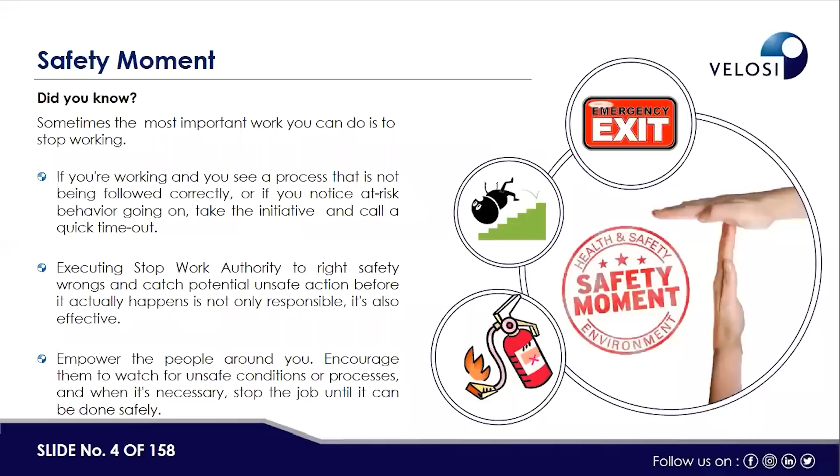Although most of us are in the comfort of our homes, it's Sunday, but some might be working, and we should be aware of the emergency exits that are around us. Due to the current COVID-19 situation and its emerging variants, we should be more careful, keep a safe distance, and in general take care of ourselves and those around us.

Today's agenda includes an introduction about our company Velosi, the project objectives, scope of work, case study overview and results, and then we'll have a Q&A. Now I'll hand it over to Mr. Imran Saeed, who will start with today's topic.

Good day to all the participants attending this online session. As my colleague earlier stated, today's topic is related to the integrity and HSE management of petrol stations. The first part of the presentation will be the introduction, covering the technical part about the HSE management system for petrol stations.

Importance of integrity and HSE management in the oil and gas industry: ensure that infrastructure, facilities and equipment are working correctly and efficiently without jeopardizing employee and asset safety or negatively impacting the environment. Like other HSE studies and risk assessments, the overall purpose is to ensure the safety of people, the environment, and the capital assets.

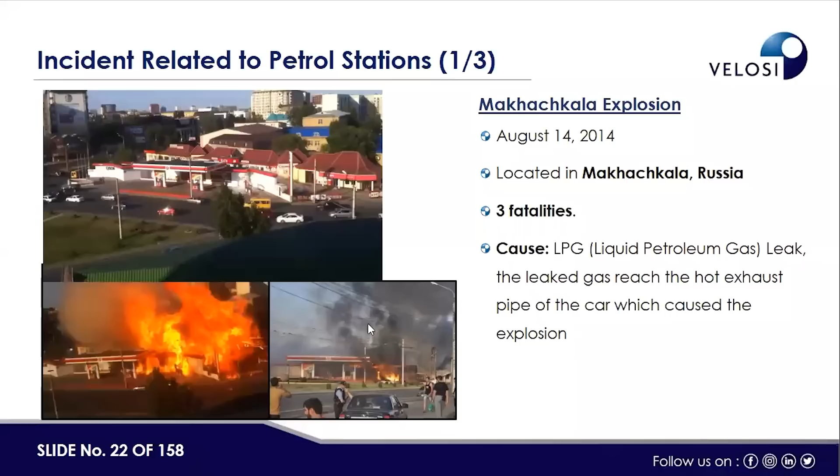As we are all aware, some petrol stations are near cities where a lot of people are living. So in order to ensure the safety of people and environment, because these are areas where any leakage can cause an explosion, which can ultimately injure or even kill people living nearby.

If we implement these studies, the HSE and integrated management system, what benefits can we achieve? These are summarized as below, not all, but a few: ensure the well-being of all employees, identify the potential HSE risk, identify measures to deal with these risks, minimize risk of unnecessary downtime, reduce costs associated with accidents and incidents, avoid preventable

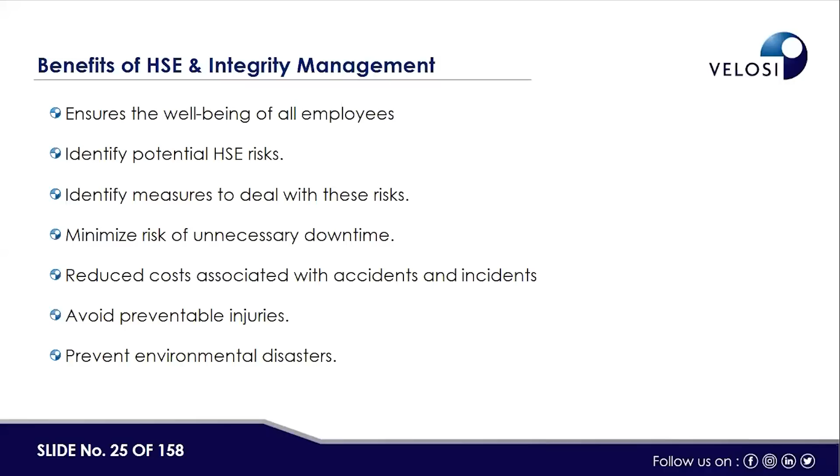injuries, prevent environmental disaster. As we explained earlier, the steps are: first we need to identify the hazards, then we need to evaluate these hazards, which is called the risk, and then ultimately we can reduce the risk and the costs associated with accidents and incidents.

There are different reference standards used in order to carry out these studies, which are listed here, like NFPA 30A and HSG 146, which are basically the main two: NFPA 30A, Code for Motor Fuel Dispensing Facilities and Repair Garages, and HSG 146, assessing and controlling the risk of a fire and explosion at sites where petrol is stored and dispensed as a fuel.

Then the API-RP 2005, and then in order to evaluate, because at the petrol station there are storage tanks and associated piping, in order to identify the risk, the damage mechanism, and perform the risk assessment, the standards associated with this risk assessment study are like 571, 580, 581.

Then because in the petrol station there are underground facilities, underground storage systems, API-RP 1615 for these, API-RP 1621, 1631, then for the underground piping and storage tank, to provide external protection, CP systems are installed, and for that API-RP 1632, then the management of underground petroleum systems, API-RP 1635.

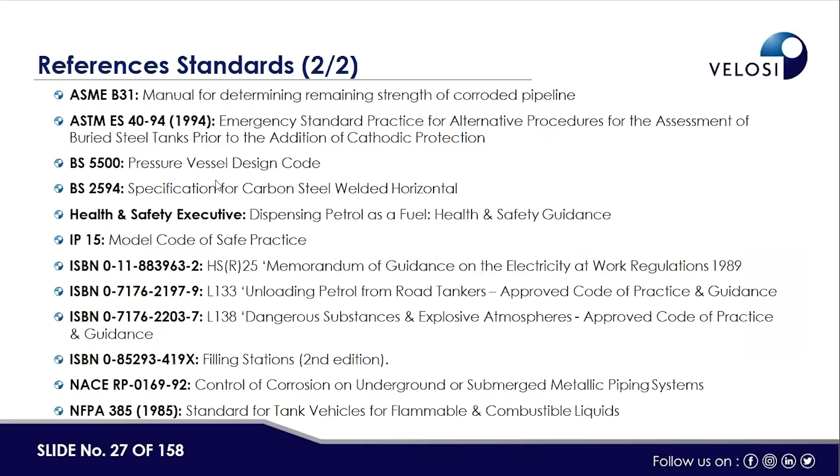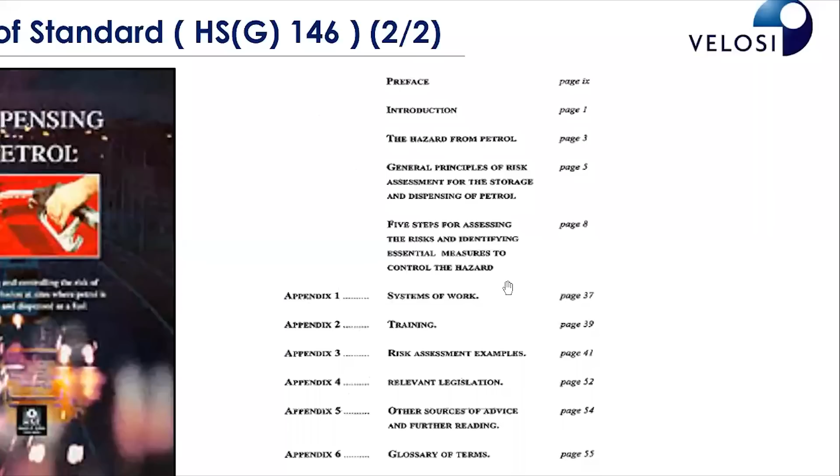This is the table of contents: introduction, the hazard from petrol, general principles of risk assessment for storage and dispensing facilities. There are basically 5 steps for assessing the risk and identifying essential measures to control the hazards, then the system of work, training, and risk assessment examples. We will define these steps in detail in our next slide where we will present the case study.

The other standard, an overview of API-RP 2005, which provides information and recommendations for service station facility managers, employers, or designated site operators on the basic principles of safety and fire protection.

The type of service station operations covered include full service, self-service, with or without repair bay, car washes, convenience stores, food kiosks, and also truck stops and quick lubes. These are the basic facilities and different items within a petrol station, and it covers how we can protect these.

This standard is presented in two sections. Section 1, general service station safety measures, addresses issues common to all types of service station operations. Section 2, service stations with repair bay operations, covers the unique concerns of this type of operation. These are the contents of this standard.

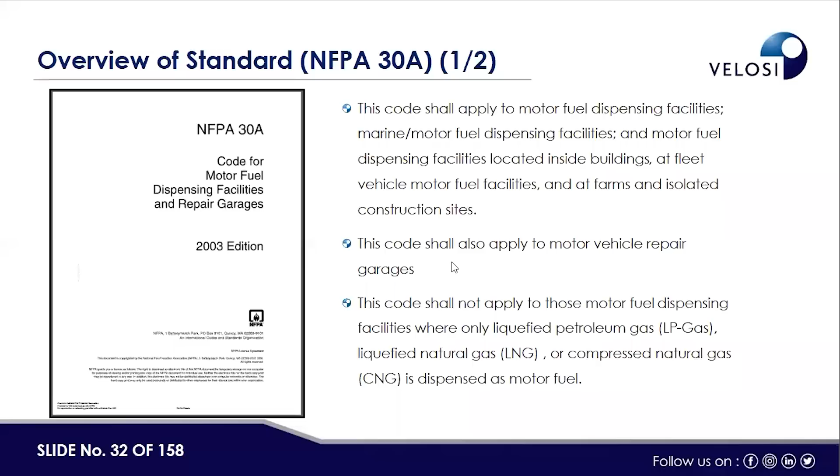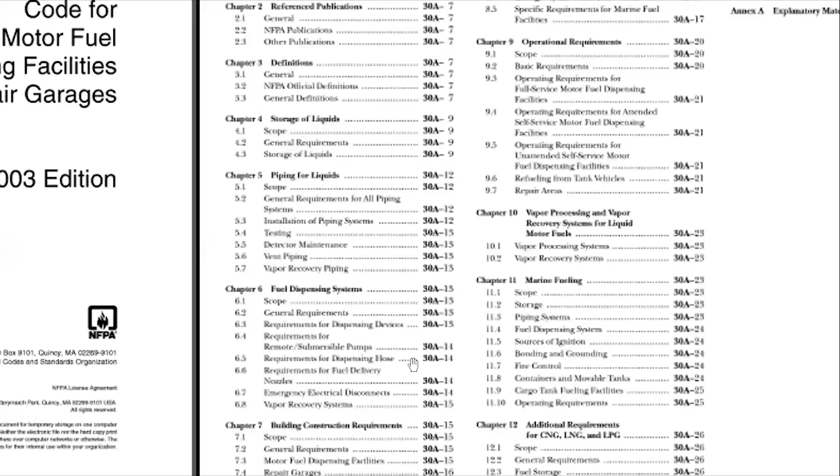The table of contents: the first chapter is about administration, which covers scope, purpose, and application. The next section is about reference publications, then definitions, then storage of liquid, then piping used for liquid from the storage facility to the dispensing machines, and fuel dispensing systems—their requirements about pumps, submersible pumps, dispensing hoses. Then the next sections cover buildings, electrical installation, operation requirements, vapor processing, and vapor recovery systems. These are the different chapters covered under this standard.

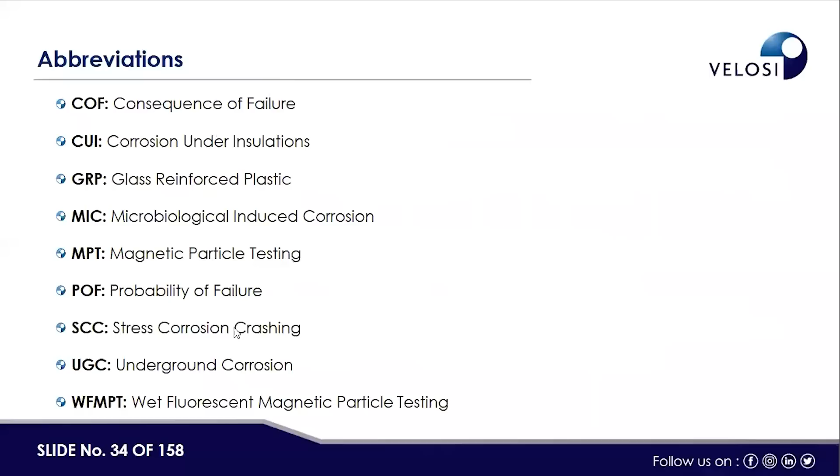Now we will go to different definitions, to give listeners an overview. These definitions have been taken as per NFPA 30A. All listeners may be well aware of these definitions, but we will quickly go through them so they can be memorized and reminded.

Above ground storage tank: a horizontal or vertical tank that is listed and intended for fixed installation without backfill, above or below grade, and is used within the scope of its approval or listing. Bulk plant or terminal: that portion of a property where liquids are received by tank vessel, pipeline, tank car, or tank vehicle, and are stored or blended in bulk for the purpose of distributing such liquids by tank vessel, pipeline, tank car, tank vehicle, portable tank, or container.

Combustible liquid: any liquid that has a closed cup flash point at or above 100 degrees Fahrenheit, which is 37.8 degrees Celsius. So any liquid that has the flash point at or above 37.8 degrees Celsius.

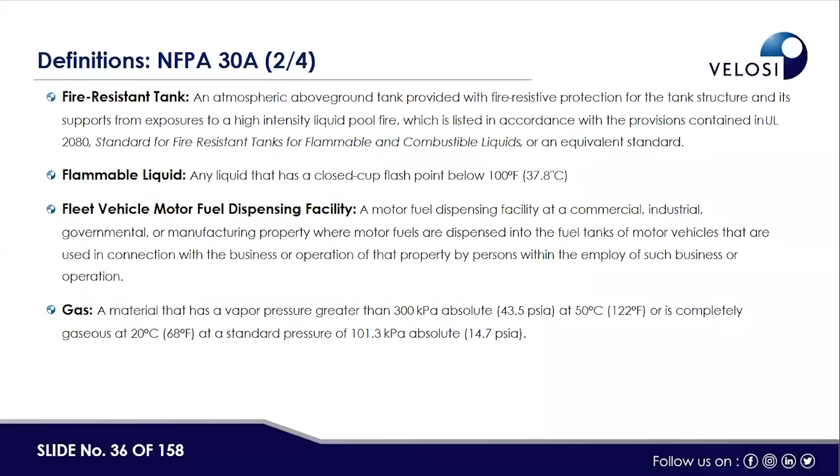So these are basically definitions, and we will just quickly go through. Then gas, by definition, is a material that has a vapor pressure greater than 300 kilopascal absolute, or 43.5 psia, at 50 degrees Celsius, and is completely gaseous, or is completely gaseous at 20 degrees Celsius at a standard pressure of 101.3 kilopascal, which is basically 14.7 psia absolute pressure.

Liquid, then low melting point material, which includes ductile materials such as aluminum, copper, brass; non-ductile materials such as cast iron; and rigid and non-rigid polymeric materials such as plastic and fiberglass reinforced plastic, that soften on exposure to fire and that are partially or completely consumed by the fire.

Then marine motor fuel dispensing facility: a motor fuel dispensing facility at or adjacent to the shore, a pier, a wharf, or a floating dock where motor fuels are dispensed into the fuel tank of marine craft.

Motor fuel dispensing facility: that portion of a property where motor fuels are stored and dispensed from fixed equipment into the fuel tank of motor vehicles or marine craft or into approved containers, including all equipment used in connection therewith. A portable tank: any closed vessel having a liquid capacity over 60 US gallon or 227 liter,

and not intended for fixed installation, including intermediate bulk containers as defined and regulated by the US Department of Transportation. Then protected above ground tank: an atmospheric above ground tank provided with integral secondary containment, protection from physical damage, and having an insulation system intended to reduce heat transfer to the primary tank when the tank is exposed to a high intensity liquid pool fire, listed in accordance with standards like UL 2085, standard for protected above ground tanks for flammable and combustible liquids, or an equivalent standard.

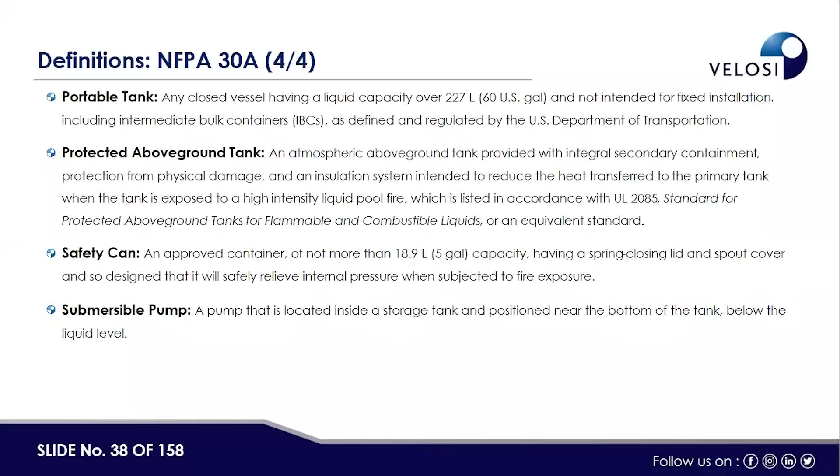So these are the different terms used as part of this subject which we are discussing today. These definitions are just for your reminder, so that you can remind yourself. Then there are some definitions which are used by HSG 146, because HSG 146 covers in more detail about the

dispensing machine and their components, like the automatic safety nozzle, the check valve. Check valve is a type of non-return valve which is used in the suction lines, which prevents petrol falling back from the line into the tank and so keeps the system primed.

Commissioning control valve. Console - a console is basically a control unit containing switches, keys, or similar items to control the operation and authorization of petrol dispensing on a service station.

Dipping - whenever there is a container at the level, the dipping term is used. So dipping is checking the level of the container or a tank.

By means of a dipstick. Then the dispenser, which is like the metering pump, a measuring system designed to draw fuel from a supply tank and dispense it into the fuel tanks or approved container.

Then the important definition, which is basically the double skin tank or the pipe double wall, which are used in order to store the fuel at the petrol stations. So by definition, these are double skin tank or the double wall.

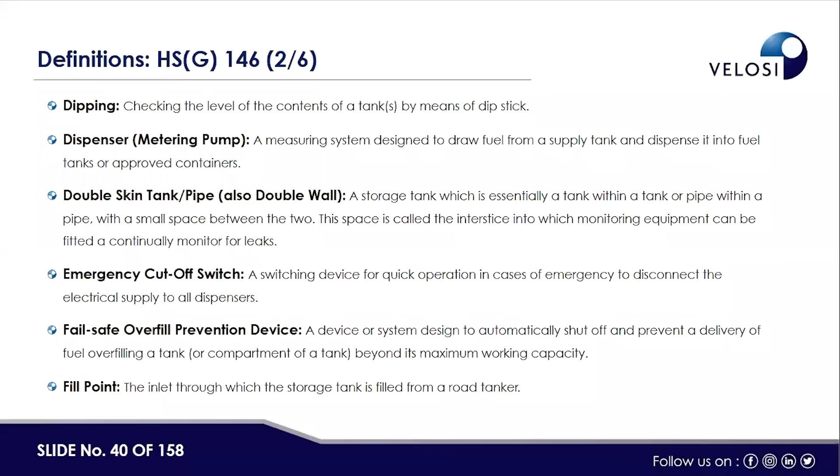Fill point - the inlet through which the storage tank is filled from a road tanker. The filling station - premises at which petrol is sold to the public and is dispensed into the fuel tanks of motor vehicles or containers. The flame arrestor - a device fitted to the opening of a petrol tank vent pipe to prevent flame entering the vent pipe and the tank.

So these are basically the different parts which are installed at the filling station, and these are by definition. Then the hazard - anything that can cause harm. Hazardous area - an area where flammable or explosive gas, vapor, or air-gas mixture may be expected to be present in quantities which require special precautions.

To be taken against the risk of ignition. So by definition, I will just go through these definitions quickly so that we will move now to our main topic.

Then the risk - the likelihood that someone will be harmed by a hazard. Suction system - where the petrol is pumped from the storage tank by a pump fitted at the dispenser.

Siphon system - the system of manifolding two tanks which automatically transfers fuel from one tank to another until the liquid level is same in both. Used mainly with submerged pumping systems.

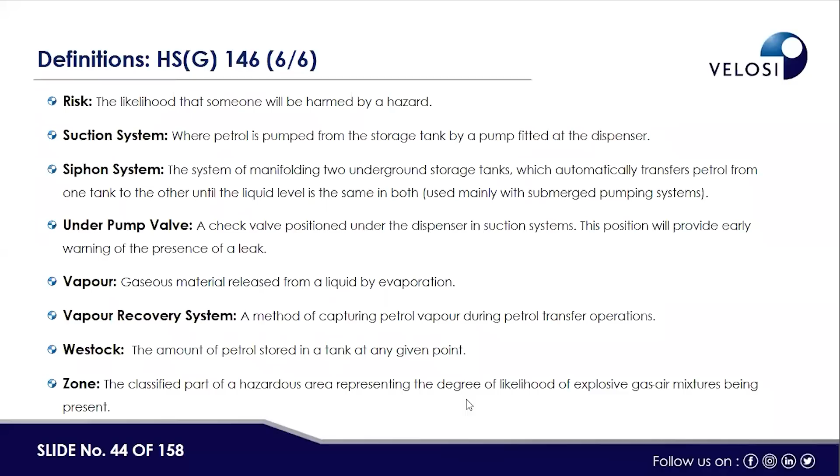Then the zone - basically in the fuel station there are different zones, a term normally used as zone. By definition, the zone is the classified part of a hazardous area, representing the degree of likelihood of explosive gas-air mixture being present.

So in the first part of the presentation, we just covered the theoretical portion, related to the basic main standards which are used for this study, like NFPA, HSG 146, and API 2005.

Now we will go to our case study. Let's just quickly go through one question - there is one question for petrol storage.

Do we have a double wall tank? If yes, what is the reason? So I think we have explained that double wall tanks are basically used to store the petrol.

The purpose is like the fuel that is stored into the main tank, and then as a layer of protection, another layer of protection - another tank or pipe - is fitted. So fuel is stored inside the tank.

If there is any leakage, rather than coming out, it will be contained between the first tank and the boundary to the second tank, and there is monitoring equipment installed which can detect the leakage from the main primary tank.

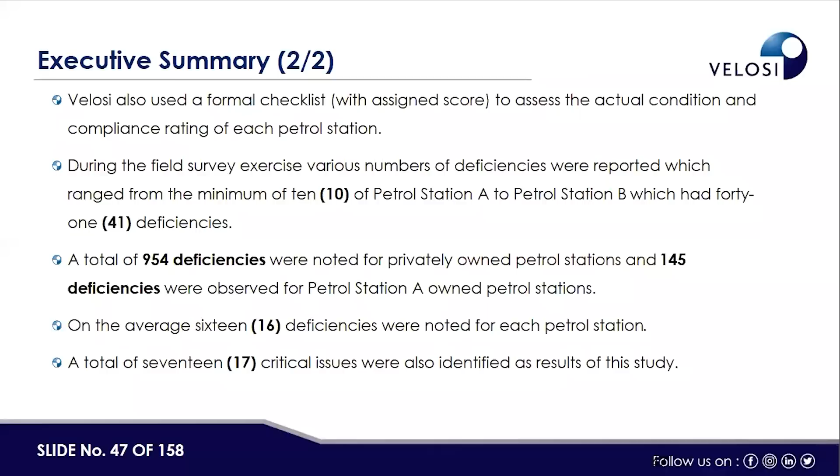Client, in its larger effort to bring the petrol stations operating in the country to world-class standards, appointed Velosi to carry out an HSE integrity study of the existing petrol stations. So that was the background, or the case study introduction.

The objective of this exercise was to provide consultancy services for HSE and integrity study of the petrol stations across the country. Someone may ask about HSE and integrity - HSE means health and safety. We basically identify the hazards, then based on that, hazard evaluation was carried out, and then from the HSE point of view, what precautions to be taken were addressed.

From the integrity study point of view, because in the petrol station there are fixed assets, like the storage facilities, the tanks, then the associated piping - from the integrity point of view, what corrosion issues would be there, then how to manage these issues, either at the design phase or at the operation phase, by inspections, by installation of a coating system. So these are basically the two parts of the study.

Then to undertake risk assessment and evaluation of the existing petrol stations, to identify any key improvements required in the safe operation of the petrol stations, to suggest remedial actions to achieve internationally accepted standards - these are the project objectives.

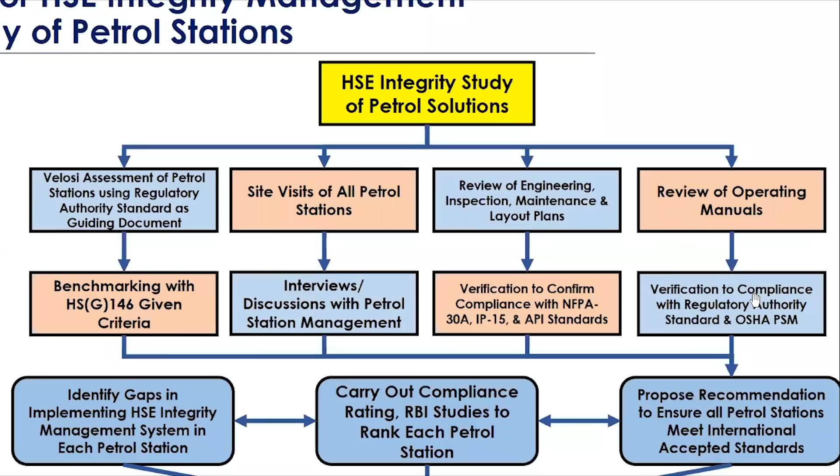Then based on these engineering, inspection and maintenance documents, verification was carried out to confirm compliance with reference to the NFPA 30A, IP15 and API standards. Then review of the operating manuals, the purpose being verification of compliance with the regulatory authority and the OSHA PSM order.

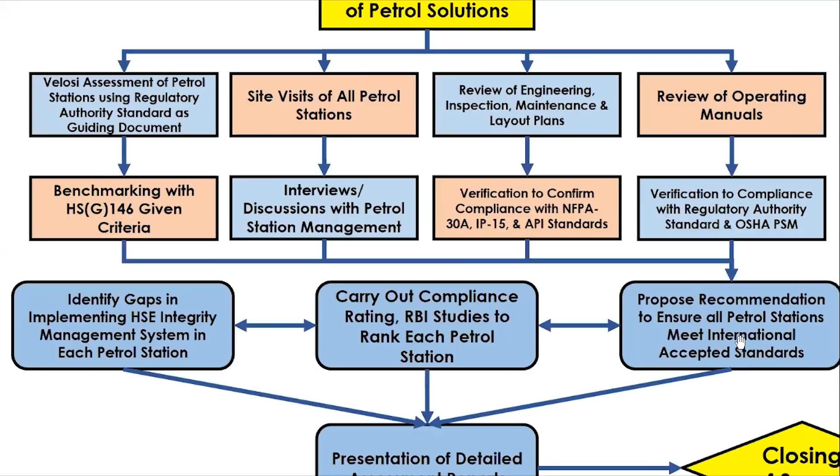As a result of all these steps, like the benchmarking, site visit, interview, review of engineering, inspection, maintenance document, operating procedure manuals, then comparison with OSHA, we carried out compliance and identified three steps: identify the gaps in implementing HSE management, integrity HSE management system for each petrol station, carry out the RBI study, then accordingly propose recommendations to ensure all petrol stations meet international acceptable standards, then present the detailed assessment report.

So these are basically the steps. Main four steps: review of the document, benchmarking, site visit, interview, review of engineering document, inspection, maintenance, then performing the HSE and risk assessment, then verification with reference to the OSHA standards.

The survey involved a visit to 70 petrol stations, which include 4 companies: company A 13, company B 7, company C 5, then privately owned and operator 42. There were 3 petrol stations under renovation and were not included in the assessment exercise.

The documents collected with reference to the standard for review to execute the study, like engineering records, were checked and reviewed in accordance with the requirements as stated in HSG 146, API RP 2005, NFPA 30A regulatory standards, QA/QC documents, operational guidelines and manual catalogs, inspection and maintenance policy, strategy, inspection and maintenance records, operators or operation training records, and general information.

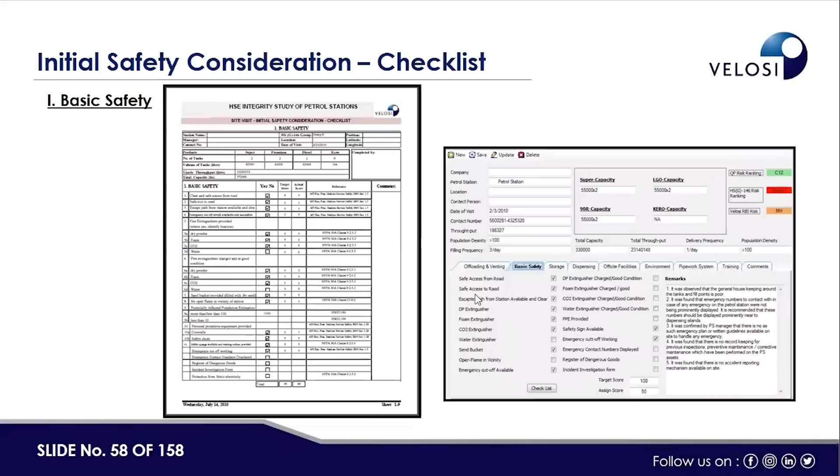So if you will see this, these were the basic safety checklist items that were prepared, and then a score was assigned, from the basic safety point of view.

Basic safety covers different questions: close and safe access from the road, safe exit, escape path, fire extinguisher provided. Based on this, there are different types of fire extinguishers like dry powder, foam, CO2, and water.

Based on these, scores were checked, both target score and actual score. Next, for fire control, a sand bucket is provided and no open flame is allowed in the vicinity. Potentially affected population from flame is checked at more than 100 meters and less than 10 meters.

Population density was checked based on the number of people surrounding the area, and in the basic checklist we discussed, these are the main parts, with their remarks mentioned.

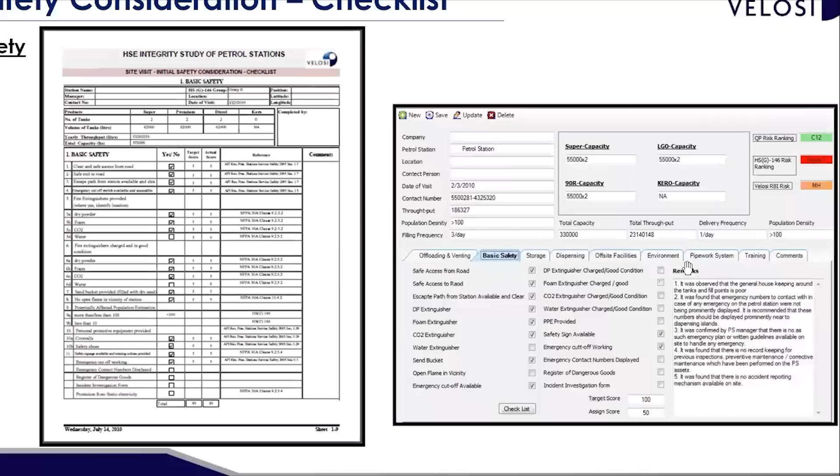If you see this, the different parts are offload and venting, basic safety, storage, dispensing, offsite facilities, environment, pipe system, training, and comments. Different questions were prepared and the checklist was filled for each.

Next is offloading and venting. These are part of the checklist, which are basically referenced. The questionnaire was prepared to check this, and the reference used was HSG 146, NFPA 30A, with their clauses mentioned.

From offloading and venting, the main points are: dedicated tank access provided, forward tanker exit path, fill point clearly marked, fill point in good condition, fill point close to dispenser, dispenser isolated during loading, fill point greater than 6 meters from boundary, overfill device, spill containment provided, and vent pipe height over 3 meters less than 5 meters or greater than 5 meters.

What will be the condition of the vent pipe? Whether the flame arrestor is provided or not, fill cap provided with captive devices or not, and fire fighting equipment near offloading. All these points were checked for offloading, and a checklist was prepared with each question given a score based on the condition, and answers provided accordingly.

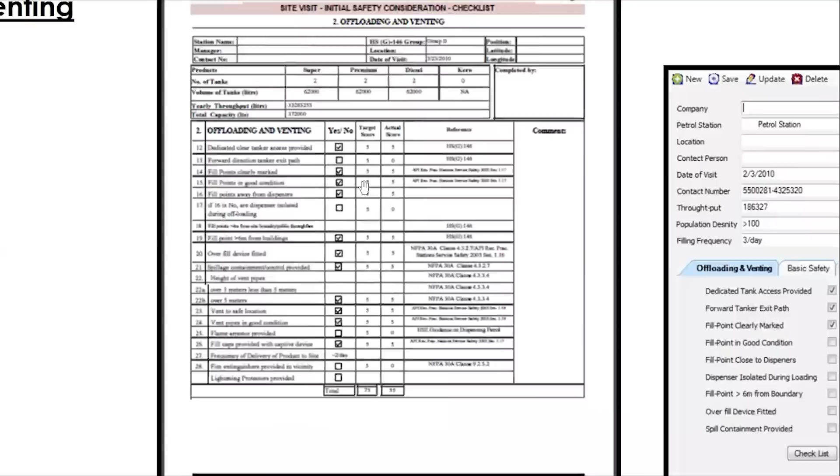So the second step, first we discussed basic safety. Second, the checklist was prepared for offloading and venting. Third was prepared for dispensing.

From dispensing, as per HSG 146 requirement, the dispenser should be installed in a safe location: greater than 4 meters from the side boundary, greater than 6 meters, 9 meters, and accordingly they checked from the site survey where it falls.

Dispenser undamaged, clearly marked route to and from the dispenser, dispenser provided with safety barriers, nozzle and hoses in good condition, volume time limit cutoff provided, breakaway coupling provided. So all these were checked as per HSG 146.

The number of dispensers at each petrol station was checked, then against each dispenser, the number of nozzles and where these were installed. Also checked: sand bucket, dispenser damaged or undamaged, clearly marked route around the dispenser, safety barrier provided or not, nozzle hose condition, volume time limit cutoff, and breakaway coupling. These are the different checklists, and each question has a score provided.

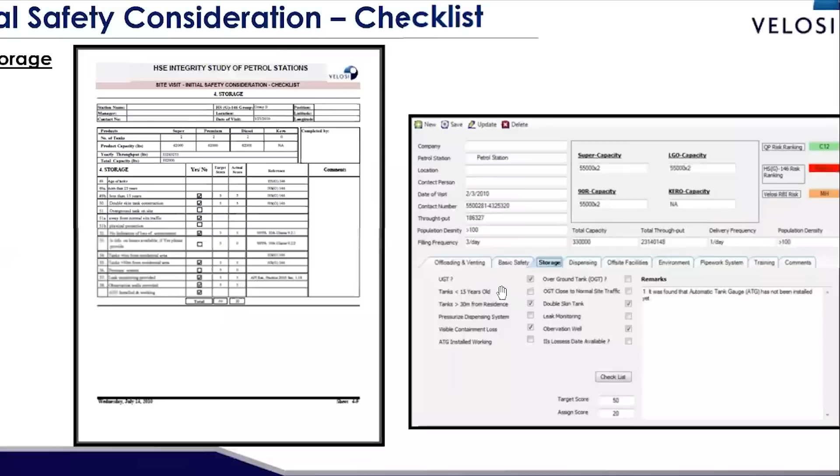If you will see this slide, these are for storage. These are the 9 elements as per HSG 146 that need to be addressed and checked as part of this HSE integrity assessment, like offloading and venting, basic safety, storage, dispensing, offsite facilities, environment, pipe work system, training, and comments. So these are basically 9 elements that would be discussed.

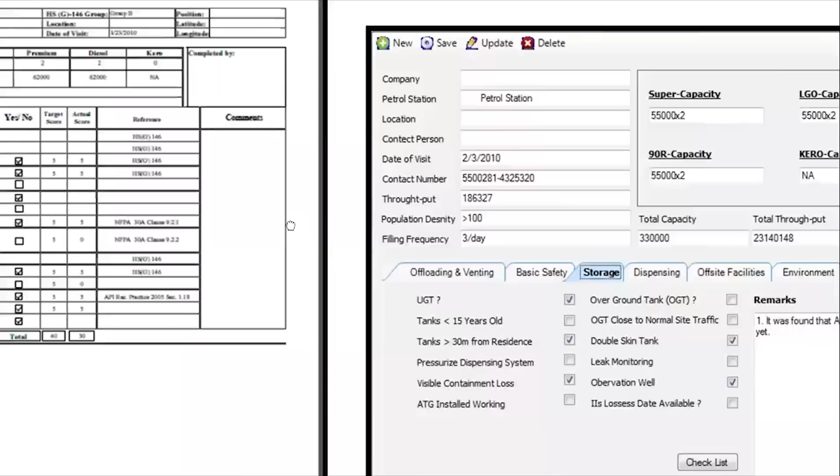So now as part of the fourth element, storage, a checklist was prepared, and then we check either for the storage tank any inspection was carried out. What is the life of the storage facility, storage tank? 15 years, less than 15 years, 25 years.

Either the storage tanks are double skin, yes or no. Overground tank present or not. Stay away from the traffic side, physical protection. Based on this, these questions were checked and they were populated into the Velosi software.

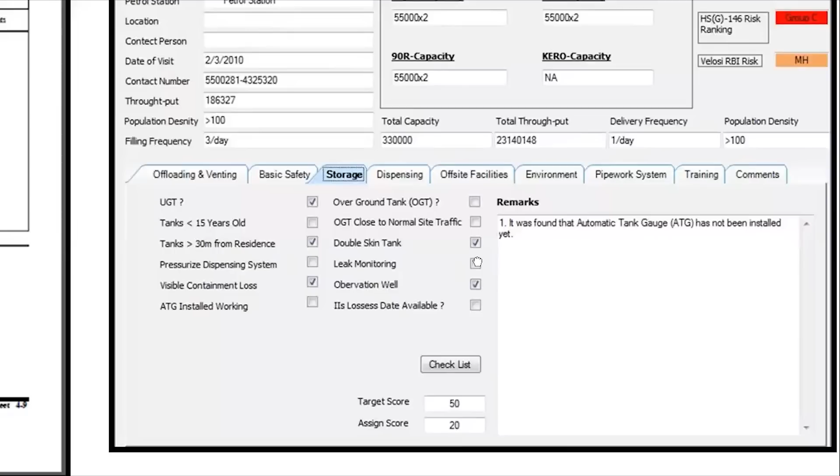For example, super capacity, LGO capacity, and from the storage, any inspection carried out, live pressurized dispensing system, visible containment loss, ATG installed working, overground tank close, double skin tank. So there are double skin tanks present, any leak monitoring system available, and what will be the health of that leak monitoring system. Then the next is the pipe work system, because from the storage to the dispenser, there is a pipe work.

From the pipe work, we check either the pipes are metallic pipeline or non-metallic pipeline. What is the age of the pipeline? Either single skin, visible containment loss from the pipe. The checklist was prepared with respect to the age of the piping system, then either double skin or single, and if it is metallic, then either the pressure system, any incident or loss of containment observed.

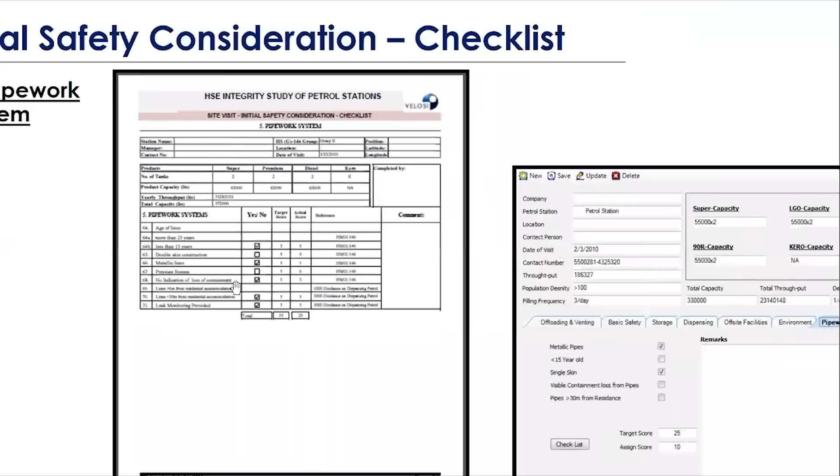So these are the questionnaire or checklist prepared as per the HS(G) 146 requirement. Then the next is spill containment offsite facilities. Spill and containment and offsite facilities can spill from the filling areas, drainage system. So basically there are systems, then different areas like car wash, oil change area, warehouse, restaurant.

The training of the staff or people working at the petrol station ensures that in case of any incident, they have the awareness of how to control this type of risk.

After the training, housekeeping is also an important part as per HSE and NFPA requirements, especially NFPA 30A clause 9.2.7, which emphasizes housekeeping, so that we need to ensure that the access ways and route maintenance area are clear of refuse.

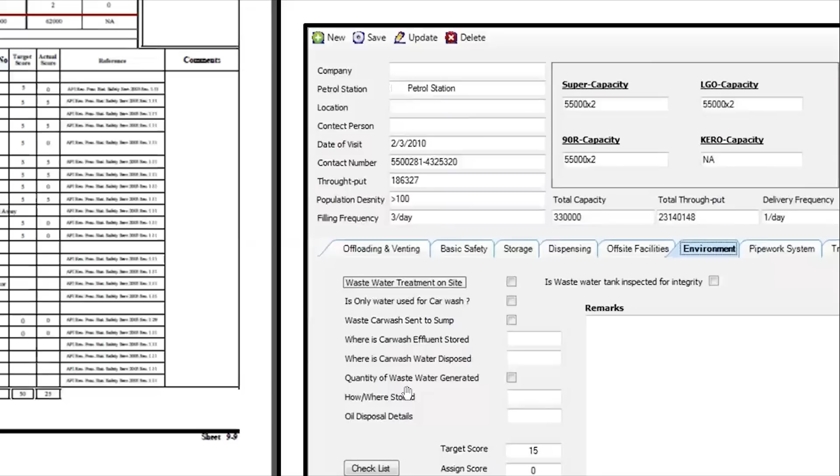Where the car wash effluent is stored, where the car wash water is disposed, quantity of wastewater generated, where it is stored. So based on these, because this is the car washing area, we check where the wastewater is stored and where the treatment process is carried out.

Then from the next element after the environment, the storage - as per HSE, we need to check the age of the tank.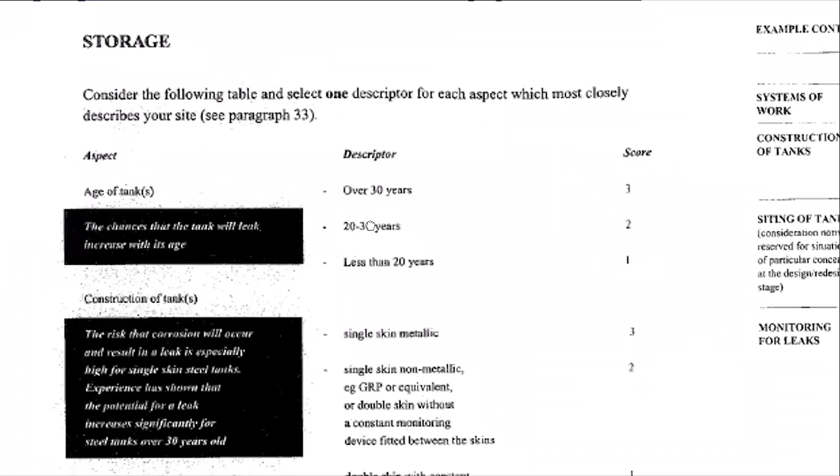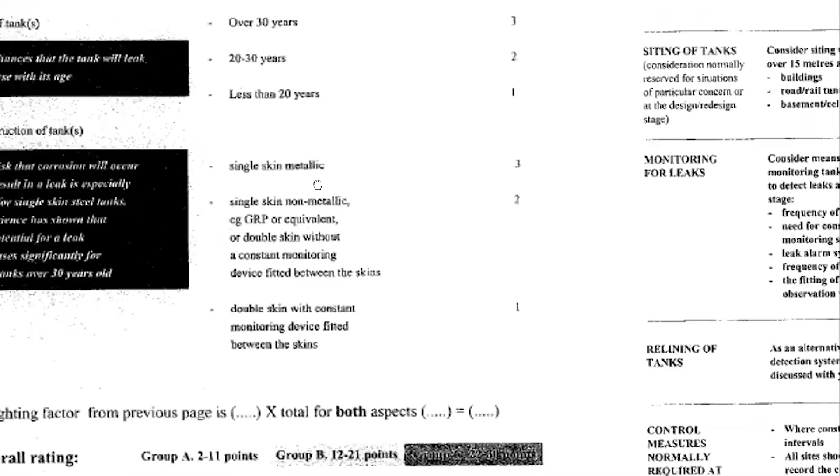Then with respect to the numbers, their scores with respect to the age: less than 20 years, 20 to 30 years, greater than 30 years. Then about the tank, either it is single skin metallic, GRP or equivalent, or double skin without a constant monitoring device, or double skin with constant monitoring.

So there are different types, and accordingly the overall rating is assigned based on the scoring. If you consider the siting of the tank, monitoring means of monitoring tank content to detect leaks, frequency of dipping, need for constant monitoring systems, and leak alarm systems. Like storage, this data was populated into the waste plant PSRA, then the score was assigned and accordingly the overall rating was carried out for this element.

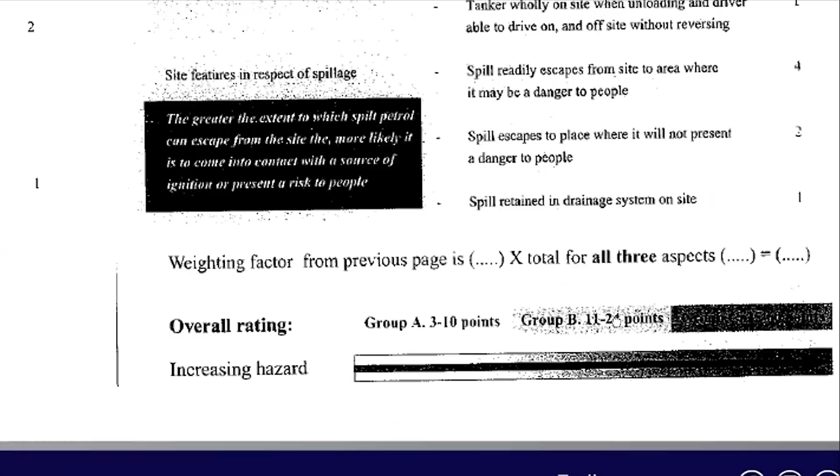Basically, the area or location is important, where the petrol station and dispenser are installed and what is the distance in between. Then accordingly the rating is assigned, and based on the ratings, if the overall points are within 3 to 10, it will be group A. If 11 to 24, group B. If more than that, it will be group C.

These questions cover different perspectives: the distance, whether the tanker is wholly or partly offsite when unloading, and whether entry and exit at the site is difficult for the tanker. Based on storage, dipping, monitoring system, and entrance and exit, and site features for the case of any spillage, weighting factors are applied and the overall rating is determined.

Then for delivery and venting, same as we discussed, based on that the stock data was populated into the whale plant against each component within each petrol station.

The assessment approach for the pipe work was carried out based on the life or remaining life of the piping: less than 20 years, 20 to 30, or greater than 30 years. Higher numbers mean it falls into a higher category where more monitoring, inspection, or maintenance is needed. Then from the construction point of view: single skin metallic, single skin non-metallic, or double skin with constant monitoring between the skins.

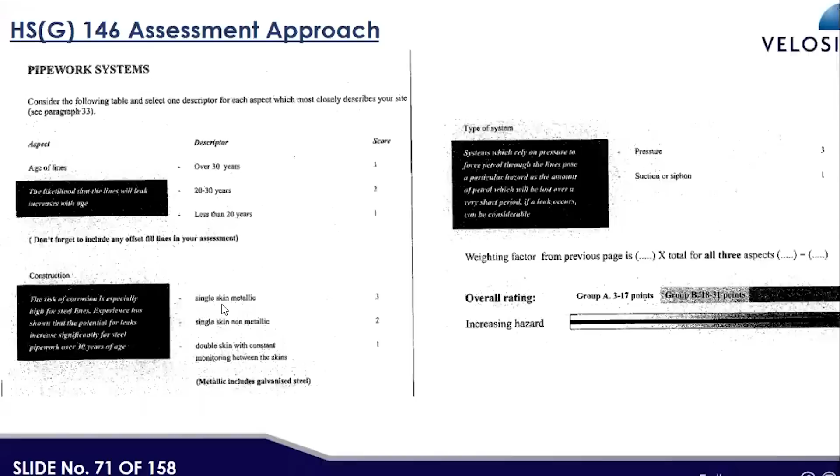The double skin with constant monitoring is basically reliable, good, and gets a lower score, whereas single skin non-metallic and single skin metallic score differently. Based on these factors, the life and type of system, the score was assigned, and the rating was carried out based on these scores.

The assessment approach covers construction of the lines and leak monitoring systems. There are different components installed on the piping system, like check valves, control measures, systems of work, location of dispensing equipment, improved visibility and supervision, incident control measures, and fire separation measures. These are the basic elements used for the assessment.

For the pipe work, after checking the data, it was populated into the VAIL-PSRA to check the overall weightage, and based on the overall weightage, the overall rating and questions were determined for the age of the pipe, material of construction, and type of pipeline monitoring system.

Then as per the HS(G) 146 assessment approach for the dispenser: either standard dispenser certified aspects like electric pump with no standards, or if the pump is certified with the SFA 3002 standard, a score, or if certified with BS 7117 or equivalent, then another score.

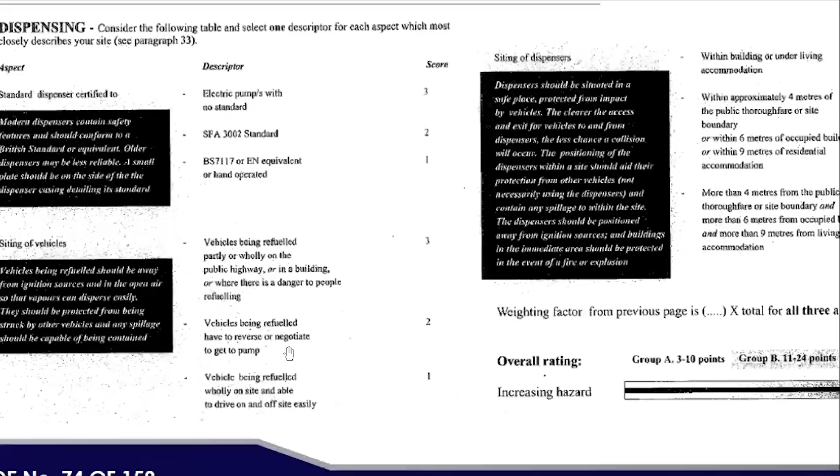Then the siting of vehicles: vehicles being refilled partly or wholly on the public highway or in a building scores one level, vehicles being refueled having to reverse or negotiate to get to a pump another, vehicles being refueled wholly on site and able to drive in and off-site easily another. Also the site condition, whether it is within a building or under living accommodation, or how far away, at 4 meters, greater than 6 meters, 9 meters, then accordingly the score is assigned.

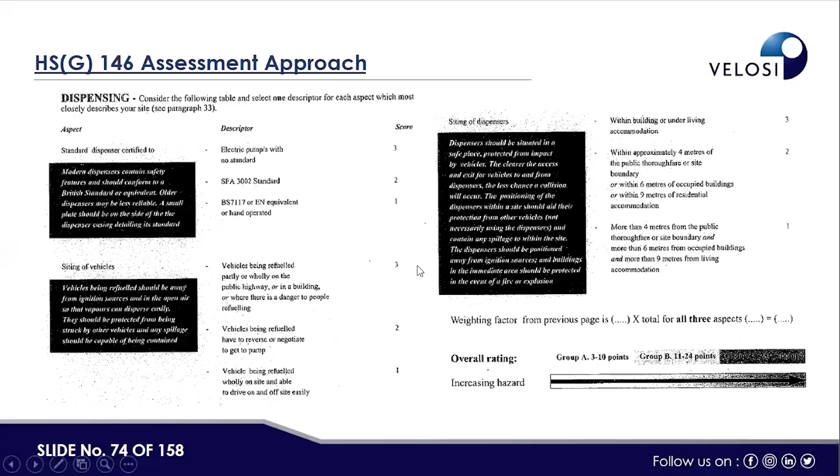These are points which we basically checked as part of the visual inspection and review of documents. Accordingly a score was assigned, and if the score is between 3 to 10, it falls into category A. If 11 to 24, into group B. If more than that, it means increasing hazard, which means we need to take special precautionary measures.

The same data was populated into the fair plant software PSRA. These are basically the risk assessment checklist as per HS(G) 146, the same items we discussed that were covered under this risk assessment checklist.

These are basically different parts. The second is like a site visit and data. We basically provided you the approach of how the HSE integrity assessment was carried out and their compliance

with respect to HS(G) 146 and NFPA. So the summary of the categorization, the grouping of each petrol station into group A, B, or C, is done based on factors. If you remember, in the executive summary we mentioned these categories. This grouping of A, B is classified as defined in HS(G) 146 for each product stored in the fuel station and associated facilities, based on the safety layout, offloading and venting system, storage, pipe work, and dispensing.

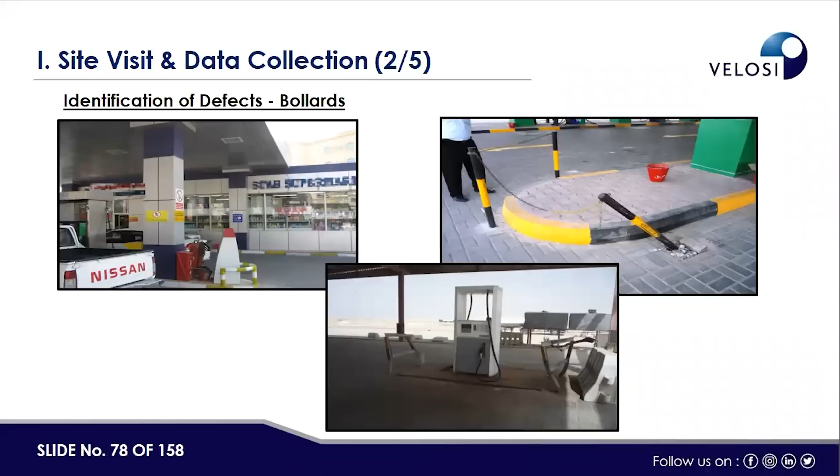As part of the site visit, first we checked the identification of defective bollards. From the housekeeping point of view, and from the entrance and exit path, we checked that it will be safe, with no hindrance, and wherever there were abnormalities, they were checked and reported. So these are some of the different defects that should not be there for safety as part of the standard.

Then from the access and exit point of view, as we discussed, access should be clear, and the entrance and exit path should be clear.

Then from the visual inspection result point of view, there are different assets that were visually inspected. For example, dispensers: there were 641 dispensers installed, and out of 641, 237 had some defects noted, which are major issues like the provision of breakaway coupling and pipe shear on the dispensing unit.

Then from the tank storage facilities, there were 401 tanks, and for 298 of them some defects were observed. The tanks were basically used to store Premium, Super, LGO, and Kero.

There are 143 tanks for the storage of Premium, and for 108 of them defects were observed. Similarly, for the Super tanks, out of 130, 95 had defects observed.

So the defects were like the automatic tank gauge - tanks greater than 15 years old do not have this feature. So tanks that were around 15 years old did not have any automatic tank gauge system. This was the major defect, the major abnormality that was observed.

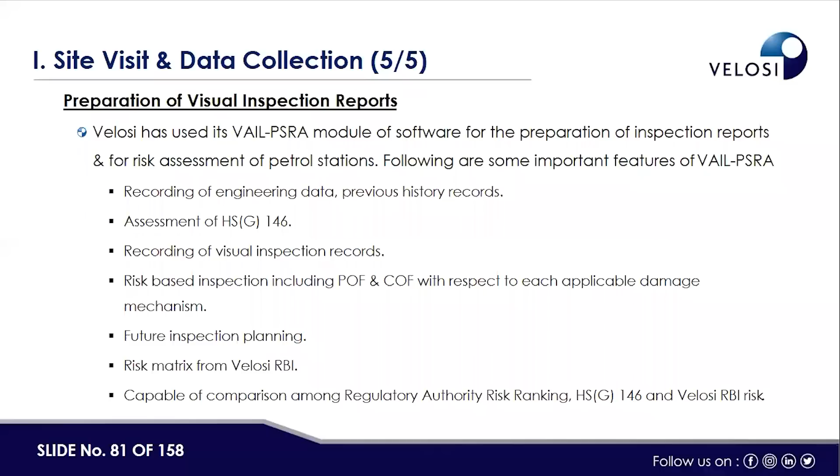The steps like recording in the VAIL software, which we already showed you, and in the next slide you will also get more detail on the recording of engineering data, history, and assessment as per HS(G) 146 for the 9 elements we discussed earlier - recording of the visual inspection record, then the risk-based inspection including assigning the probability of failure and consequence of failure with respect to the applicable damage mechanism for each equipment and piping, future inspection planning, the risk matrix, and the comparison among regulatory authority ranking, HS(G) 146, and Velosi RBI risk.

Critical issues were found, like the protection against static charge. There were 49 petrol stations where no protection against static charge was provided for offloading operation. If you remember, one of the causes of fire at a petrol station and LPG facility in Russia was no protection against static charge, and due to the static charge, the explosion occurred. That was a critical issue.

Then the inaccessibility of emergency cutoff switches. These are mandatory so that if there is any problem, the system is automatically isolated and shut off. Emergency cutoff switches were inaccessible in 3 petrol stations. These switches were either more than 300 meters away from the offices, forecourt, or in places difficult to access for tanker drivers and site operators. Basically, they are far away from the facility where they should be installed, so that in case of emergency, this inaccessibility was a finding.

Then the flame arrestor at outlet vents. No flame arrestor was provided at the outlet vent in 66 petrol stations. Absence of the flame arrestor is a potential fire explosion hazard.

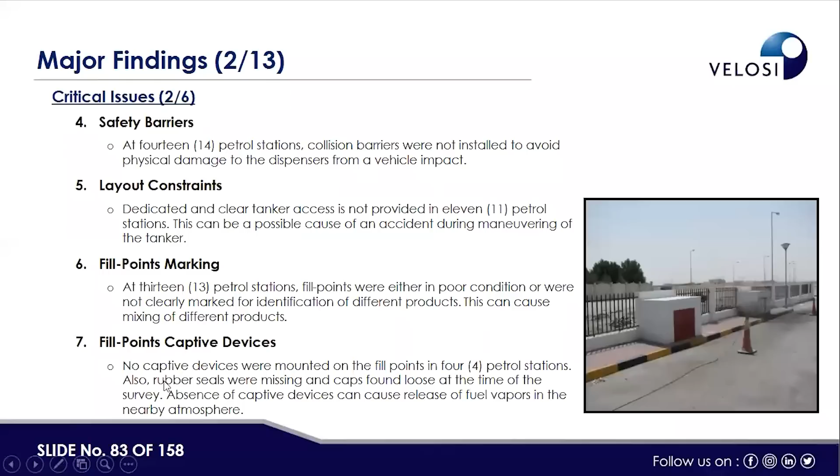Overfill devices: it was noted that overfill devices were not fitted on tanks at 60 petrol stations. Absence of overfill devices can cause fuel spillage at the time of offloading, thus creating loss of fuel and a possible fire hazard.

Breakaway coupling: at 24 petrol stations, breakaway couplings were not provided and attached to the dispensing unit. This could lead to spillage of fuel in the event of damage to the hose or nozzle.

Location of the vents: vents for 4 petrol stations were not located at a safe location. They were either near new construction or in the middle of the market square, resulting in discharge of fumes and exposure to the public. The vent discharge point should not be within 3 meters in any direction of an opening window, air conditioning unit, or other opening to the building.

Single skin tanks: normally there should be double skin tanks, but it was observed that 17 petrol stations had fuel storage tanks of single skin metallic construction. If you remember, in our previous slide on storage facilities, wherever there is a single skin, the highest criticality number was given, and this leads to criticality like group B or continuous monitoring.

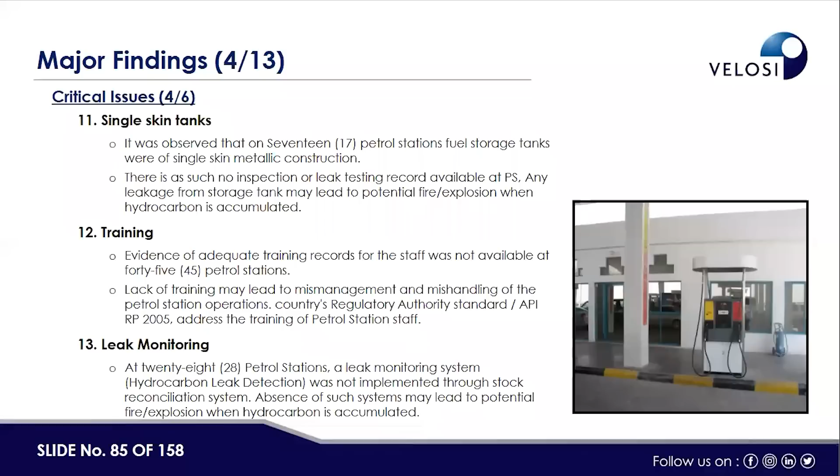Automatic tank gauges: for 39 petrol stations, automatic tank gauges were not installed. Tanks which are filled via offset fill point should be provided with an automatic tank gauge instead of a dipstick tube. So these should be like here.

CP system, because there is underground piping and underground tank, a CP system should be there to avoid external corrosion. That's basically a layer of protection.

Cathodic protection was not provided on single skin underground tanks and pipework systems at all petrol stations, and only coating was used to protect against soil side corrosion. So from soil side corrosion, one barrier is the coating, the second barrier is the CP system, because the CP system will give you the health of the coating, whether the coating is in good condition or not.

It is standard practice to have a CP system along with the external coating. That is basically the NACE requirement on new piping and tanks, for buried tanks and the piping system.

Inspection and maintenance records: maintenance is being carried out by unlicensed technicians in all privately owned petrol stations. Most of the maintenance work is done on an ad hoc basis and potentially in an unsafe manner. Furthermore, there were absolutely no previous maintenance and inspection records available. In the absence of such records, past failure trends cannot be analyzed to make any future decision.

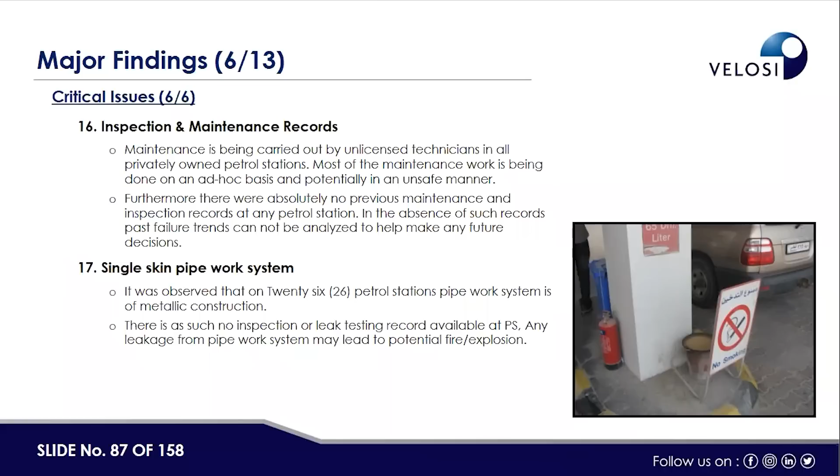Single skin pipe work system: we observed that for 26 petrol stations, a single skin metallic piping system was installed or constructed, and there was no inspection or leak testing record available at the petrol station. Any leakage from the pipe work system may lead to potential fire and explosion.

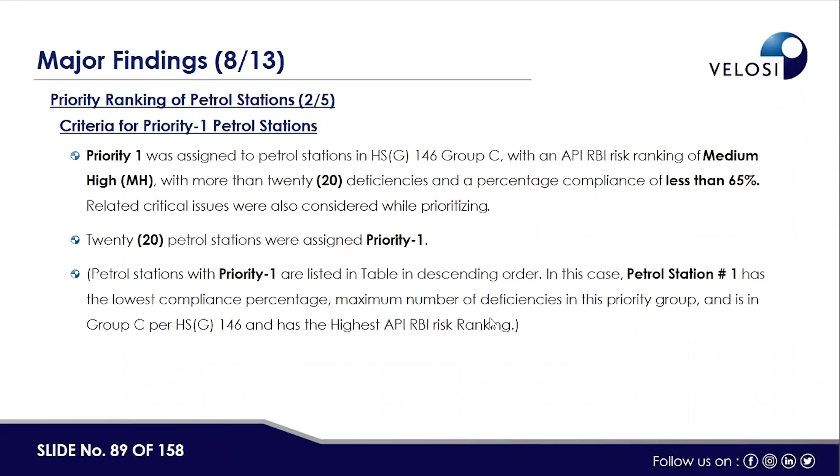20 petrol stations were put into priority 1. These are basically the petrol stations with the lowest compliance percentage, maximum number of deficiencies in this priority group, and the highest ranking as per API 581.

For the priority 3 and priority 2 criteria, and for priority 1 as we discussed: the criteria for priority 2 was assigned to petrol stations in group C, where as per API we have risk medium-high with less than 20 deficiencies. In priority 1, we have more than 20 deficiencies with the same risk. In priority 2, with less than 20 deficiencies, percentage compliance is more than 65%, whereas for priority 1 it was less than 65%. Here, more than 65%, there were 21 petrol stations in this group.

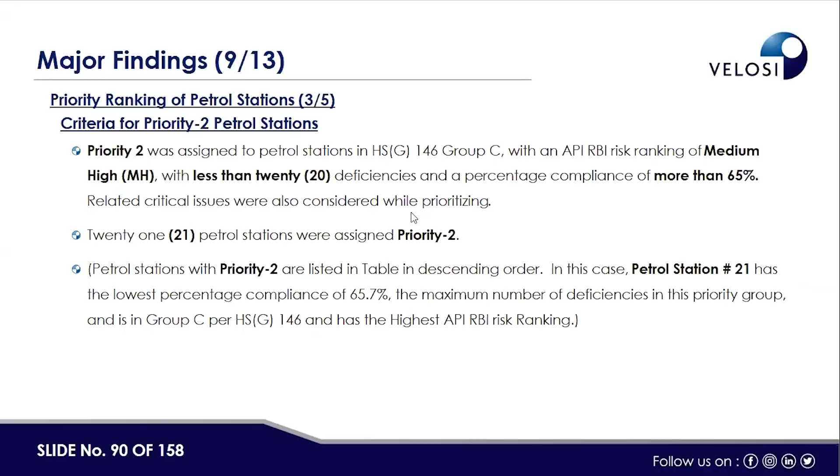Criteria for priority 3 petrol stations: the API RBI risk ranking was either medium or medium-high, the number of deficiencies reported was less than 10, and the compliance was more than 65%. 8 petrol stations were put into this priority category.

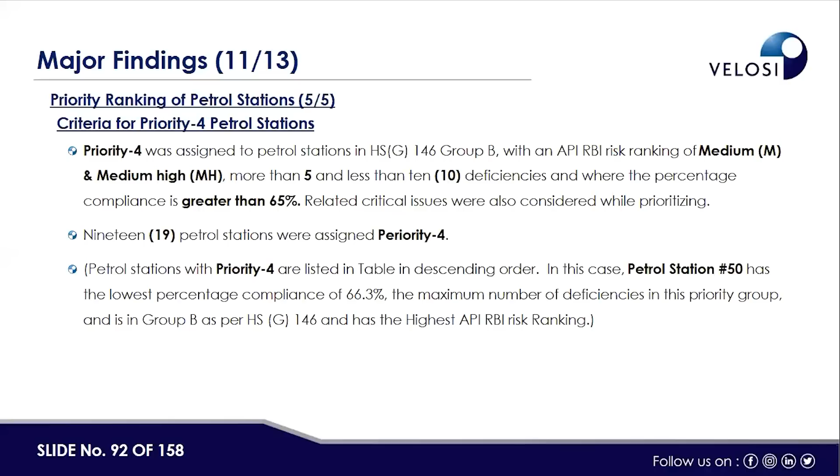Criteria for priority 4: the risk as per API RBI was the same, medium-high, but as per HS(G) 146 group B, the number of deficiencies was between 5 to 10, and the percentage compliance is greater than 65. So 19 petrol stations were assigned with this priority.

So this table basically refers, with reference to priority 1, priority 2, priority 3, and 4, to the applicable critical findings and recommendations that were mentioned with respect to each petrol station.

For the priority ranking, as discussed, priority 1, 2, 3, and 4, the risk was almost the same, medium-high API RBI, but based on the number of deficiencies. Greater than 20 deficiencies is priority 1, with compliance less than 65. Priority 2 is 20 deficiencies with compliance 65% or more.

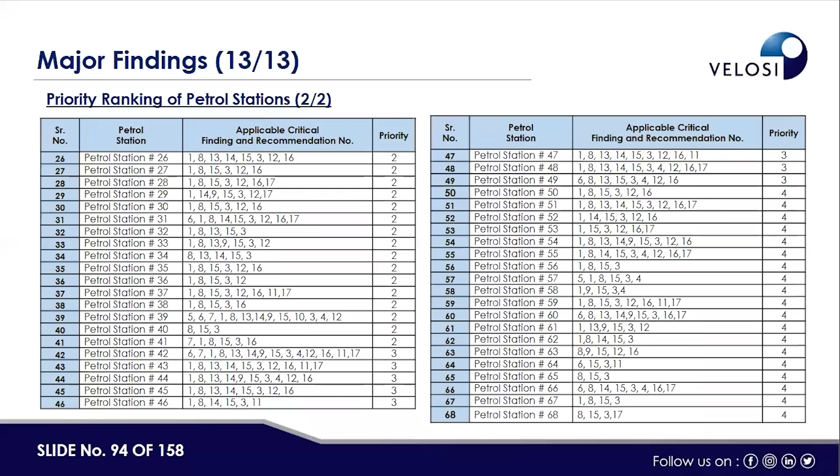Priority 3 is 10 deficiencies with compliance more than 65%. Whereas for priority 4, the number of deficiencies was between 5 to 10, with compliance more than 65%. So these are the bases on which each petrol station was prioritized.

For the compliance rating, 0 to 20% compliance was in the red zone, poor - the requirement is not being complied with in any way or format, and there is no plan to implement it. 21 to 40% is below average, 41 to 60% is average, 61 to 80% is above average, and more than 80% compliance is excellent.

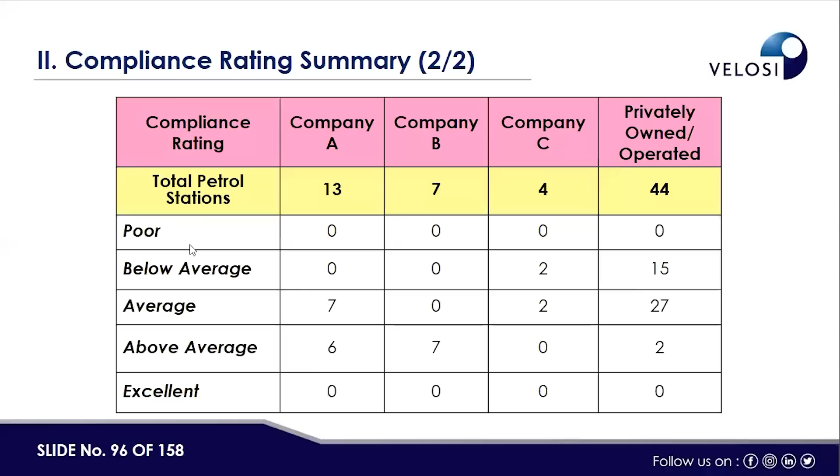So this is the overall summary with respect to the percentage of conformance and the conformance rating for the 4 facilities A, B, C, and privately owned. They were categorized into poor, below average, average, above average, and excellent. So the compliance rating was summarized in tabular form.

Then for the assets, their risk assessment was also carried out as per API 581, and the assets covered included the storage tank, piping, offloading points, venting, and the dispenser.

As part of the RBI, the steps carried out included collection and review of documents, national regulatory authority, asset type, identification of the asset type where this study applies, review of historical records, identification of the applicable failure mode, then classification, PoF and CoF assessment, risk ranking, and the inspection plan or inspection technique and logistic requirement.

The 5x5 risk matrix was used, where with respect to the different components, their risk ranking: red at the top is for high, orange color for medium-high, yellow for medium, and green is low.

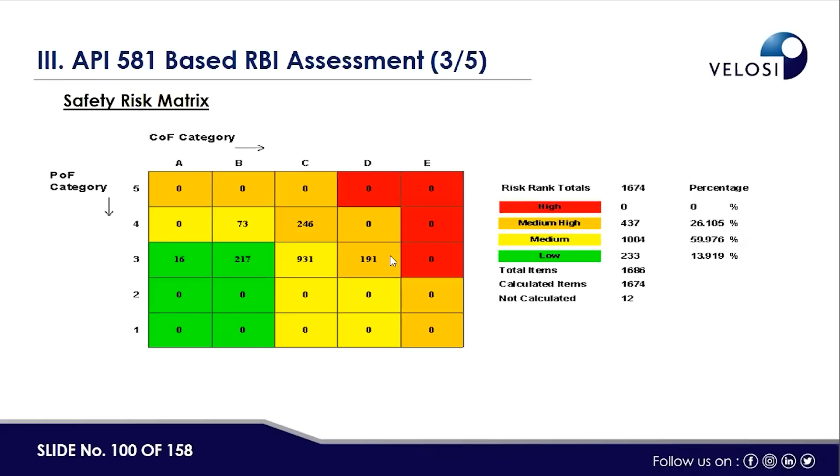So the assets which are in the green and the yellow, they are at lower risk, whereas those in the orange and the red need inspection or mitigation measures to bring the risk down to an acceptable level.

Safety risk matrix, then the environment risk matrix, business risk matrix, and then comparison was carried out between HS(G) 146 and API 581.

Regulatory authority risk categorization is mainly driven by the consequence aspect. For example, both throughput and population density are focused on the damage part. Probability of failure factors, like age, condition, and previous history, are not considered in this matrix. So these are basically from the regulatory risk matrix.

HS(G) 146 is considering consequence and age of the asset as a group categorization. However, present condition or past history of the asset is not being considered, as used in API 581.

API 581 risk ranking is carried out on both factors - probability of failure and consequence - where both PoF and CoF factors could be calculated on either quantitative or semi-quantitative aspects. So this is basically the comparison between the regulatory HS(G) 146 and API 581.

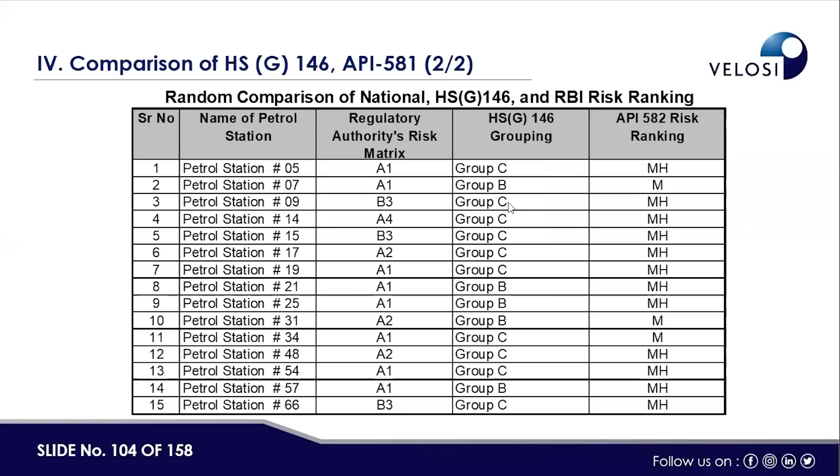Then for the different petrol stations, their regulatory risk matrix, based upon the HS(G) grouping - HS(G) 146 between group A, B, and C - where they fall, and based upon the API 581 risk ranking.

After the risk ranking, the next step was inspection planning. Inspection planning was done based on aspects like what to inspect, why to inspect, how to inspect, where to inspect, and when to inspect, where based on the applicable damage failure mode for these assets, the inspection technique, their locations, and the time was identified.

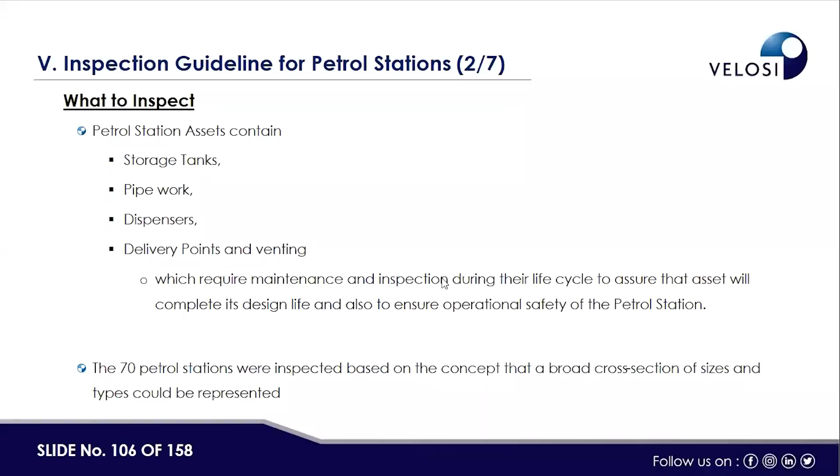What to inspect - that is basically the petrol station and the assets covered, like petrol storage tank, pipe work, dispenser, delivery point, and venting, which require maintenance and inspection during their life cycle to assure that the asset will complete its design life.

Why to inspect? There are different failure modes associated with these components. For example, for the storage tank: general thinning and pitting. If there is insulation available outside the tank, then corrosion under insulation. For the buried tank, underground corrosion. Then for the weld joint, corrosion of the weld joint. Then microbiologically induced corrosion, stress corrosion cracking, external leakage, fatigue, brittle fracture.

Then for the pumps, there are the dispensing pumps, where failure modes would be like suction cavitation, lack of fluid, reverse rotation, cyclic operation, coupling misalignment, imbalance, and closed head operation.

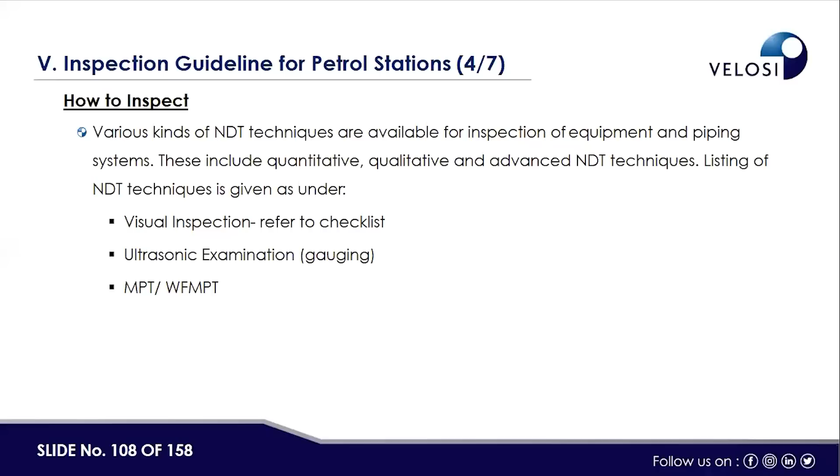How to inspect - the different inspection techniques recommended include visual inspection, ultrasonic thickness examination, gauging, magnetic particle testing, or wet fluorescent magnetic particle testing.

Then where to inspect - for a tank, reference drawings were prepared, not exact but for reference, where locations were identified for inspection to be carried out.

Then when to inspect - with reference to the different inspection techniques, their frequency was mentioned, like the elements, the 9 we covered: basic safety, offloading and venting, dispensing, storage, fire, spill containment, training, housekeeping. These are basically 9, and the 9th was others. So all these 8 elements.

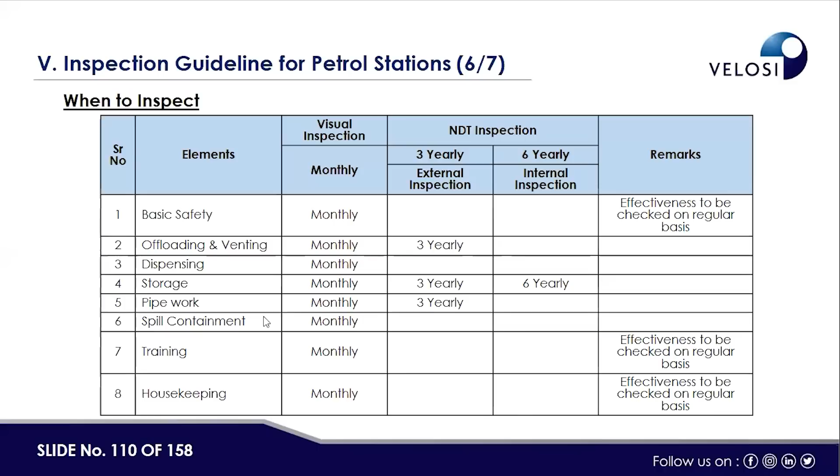When the visual inspection is to be carried out, there's NDT inspection, which is basically applicable on the offloading and venting, pipe work and the tank. External inspection, then internal inspection for the tank when it needs to be carried out.

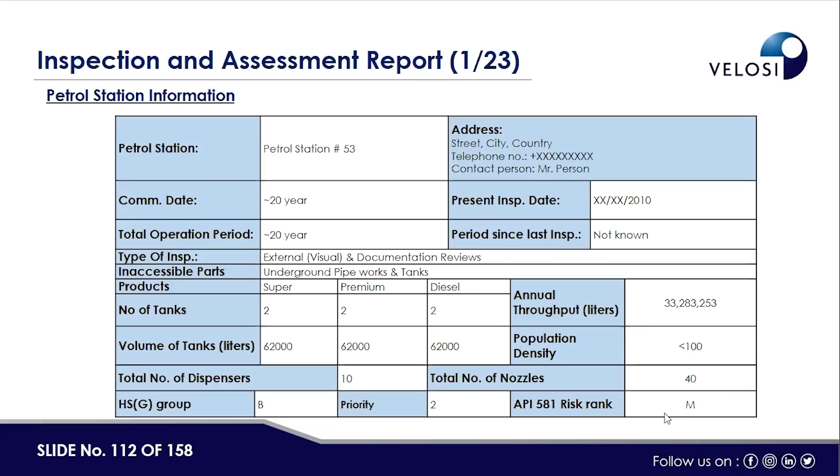Then reports were created for each petrol station, like the address, commissioning date, present date, number of tanks, volume, HS(G) group category, priority, and API 581 ranking, number of nozzles, population density, summary of major findings, then the overall group rating for all the equipment types - dispensing, storage, delivery and venting, overall weightage, and the rating, wherever the storage falls, they will be in group A or group B.

So all this is with respect to the different products which are stored, like the super, premium or diesel.

Then from the API 581 RBI assessment, the results or conclusions - the damage mechanism was assessed, then the risk ranking was carried out using failure probability and severity risk assessment, and the assets covered contain the storage tank, piping, dispenser, delivery point, venting point. The risk assessment was carried out considering standards like API 571 to identify the damage, and for piping inspection, 570, 580 and 581.

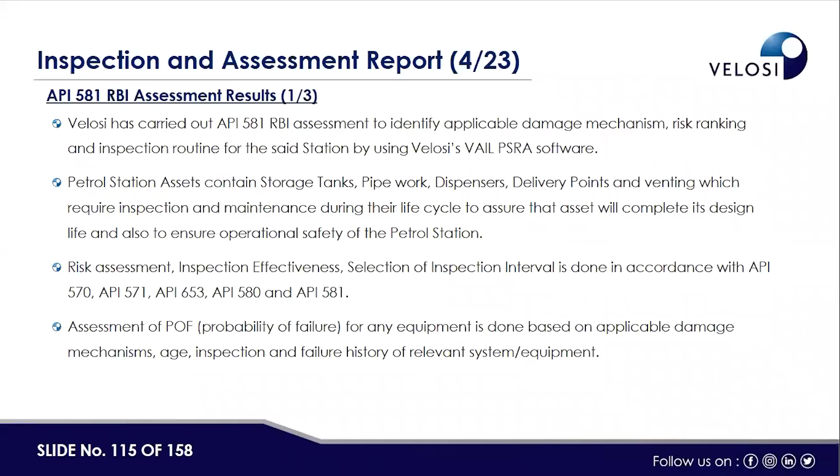The probability of failure was assessed based on the applicable damage mechanism, inspection effectiveness, and previous inspection records. The consequence of failure was assessed based on the nature of the product, throughput, and population density of the petrol station and its surroundings.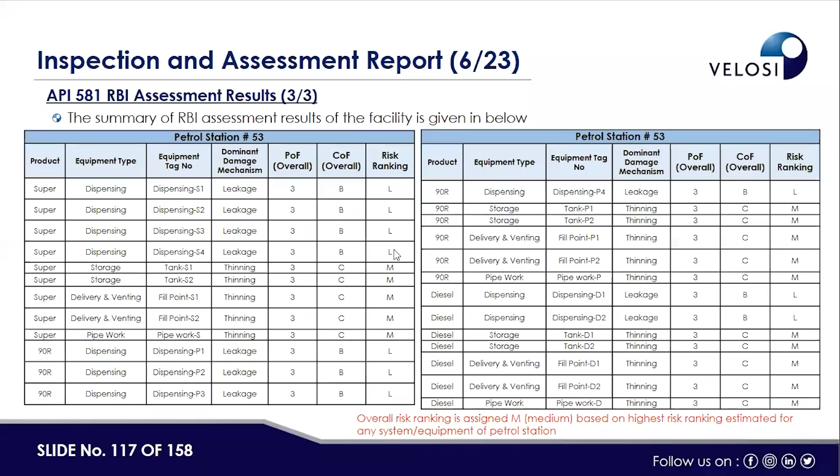Finally, risk ranking of this equipment is done by combining both the probability of failure and consequence of failure, and the results are tabulated in this tabular form - by different component, equipment type, what will be the dominant damage mechanism, and based on this, what will be the probability of failure, consequence of failure, and overall risk ranking.

Then from the inspection findings, we prepared the checklist based on API-RP 2005, which we earlier explained in our slide - what points were covered in these checklists for all the 8 or 9 elements, like basic safety, which includes clear and safe access, safe exit, escape path, emergency cut-off switch availability, dry fire extinguishers - dry powder, foam, CO2.

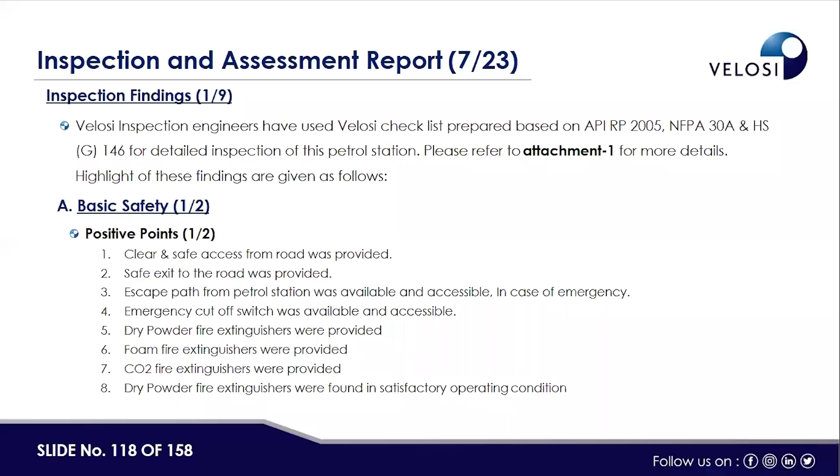From the basic safety checklist, positive points were noted along with areas for improvement. Water fire extinguishers were not provided, emergency contact numbers were not displayed, the register of dangerous goods was not maintained and available on site, incident investigation forms were not available, and appropriate measures for protection against static electricity were not adopted.

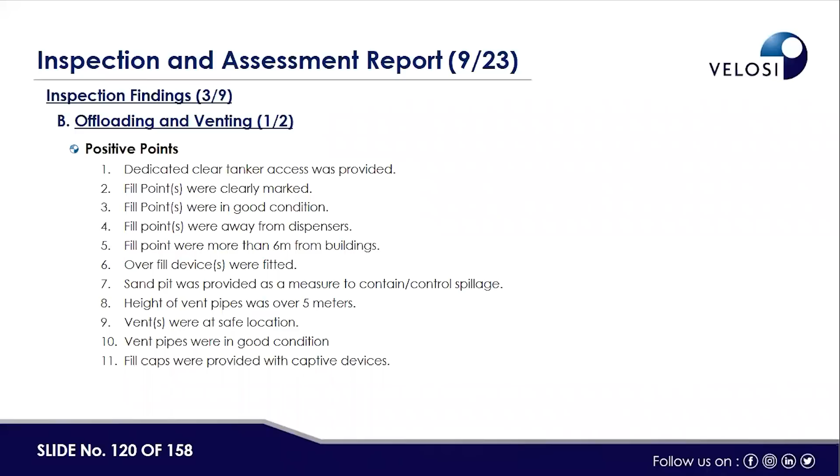For offloading, there were positive points filled into the checklist. The fill points were properly marked and in good condition, fill points were away from the dispenser and 6 meters away from the building, overfill devices were fitted, a sand pit was provided to contain and control spillage, the height of the vent pipe was over 5 meters, vents were at a safe location and in good condition, and fill caps were provided. Areas of improvement were also mentioned.

For dispensing, positive points were noted along with areas of improvement. Dispensers were observed to be 6 meters from the occupied building, found in undamaged condition, provided with safety barriers, and nozzles and hoses were in good condition. Volume-time cutoff was provided, dispenser hoses were fitted with breakaway couplings, and sand buckets were provided. Certain areas for improvement were also recommended.

For storage, positive points were noted along with areas of improvement. The tank life was less than 15 years, tanks had double skin construction with no indication of loss of containment, and they were more than 30 meters away from residential areas. An automatic tank gauge (ATG) was installed for leakage monitoring, and an observation well was provided to detect spillage movement into groundwater.

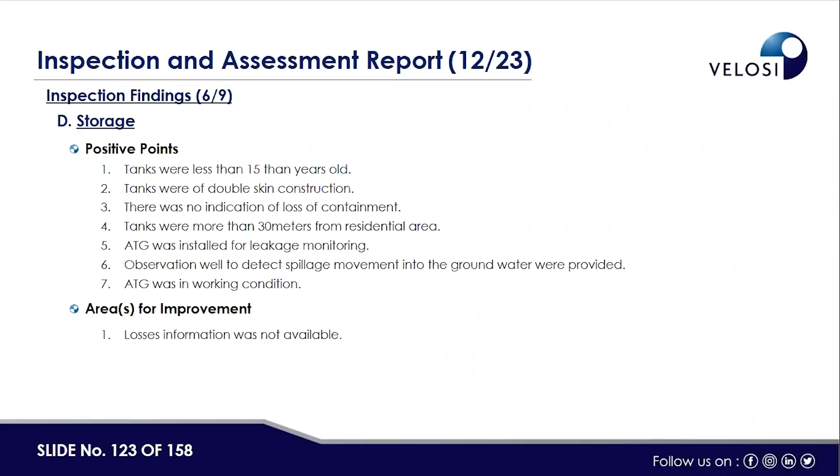For pipework, positive points included a life of less than 15 years with no indication of loss of containment, and the pipework was more than 30 meters away from residential accommodation.

From the training point of view, firefighting training was provided as a positive point. Areas of improvement included the need for staff training on emergency shutdown procedures, vehicle collision procedures, safe loading procedures, spill management training, safe dispensing operating procedures, and safety management maintenance procedures.

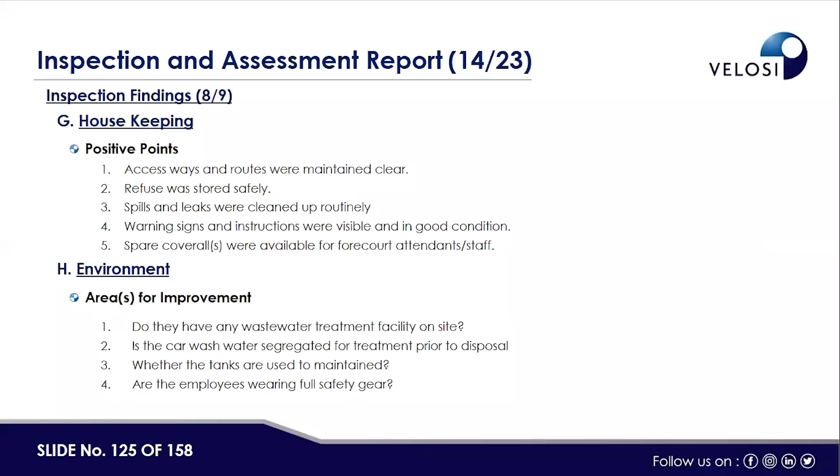A summary of the deficiencies was prepared, along with costing and time estimation for rectification of the deficiencies.

Recommendations were provided based on these findings. With respect to basic safety, water fire extinguishers should be provided to extinguish solid combustible fires, including fires due to wood, paper, and solid plastics. Water fire extinguishers should be provided in the manager's room as well as in the storeroom, and emergency contact numbers should be displayed.

Measures to avoid static electric fire cases should be adopted. Nobody should get in or out of the vehicle while petrol is being poured. Rubber-soled footwear and clothes of synthetic fiber should not be worn, and the handbrake should be engaged.

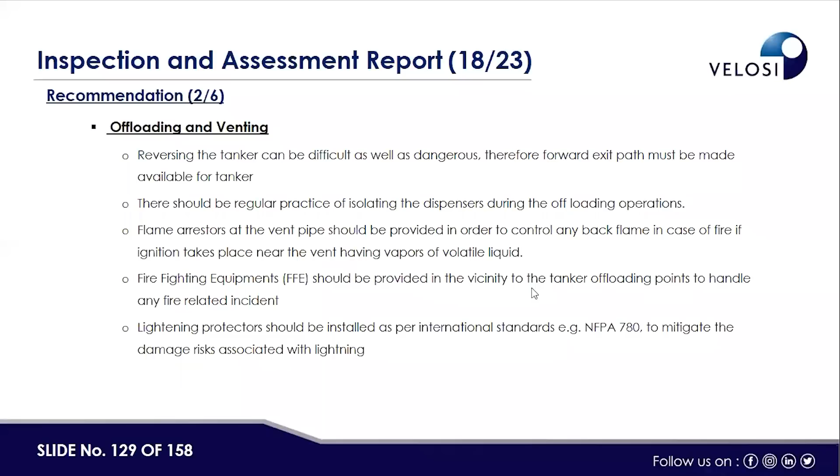Recommendations for offloading and venting include that reversing the tanker can be difficult and dangerous, so forward exit paths must be made available for the tanker. There should be regular practice of isolating dispensers during the offloading operation. A flame arrestor should be provided at the vent pipe to control any flame, fire extinguishing equipment should be provided in the vicinity of tanker offloading in case of fire, and lightning protectors should be installed.

Recommendations for the dispenser include maintaining a distance of 10 meters between two dispensing islands, with relocation of the dispensing island also recommended. Clear routing arrows should be marked around the dispenser to manage incoming public traffic and avoid confusion or vehicle collision. The ground surface should be made of impervious material, such as paint, to ensure there is no seepage in case of leakage.

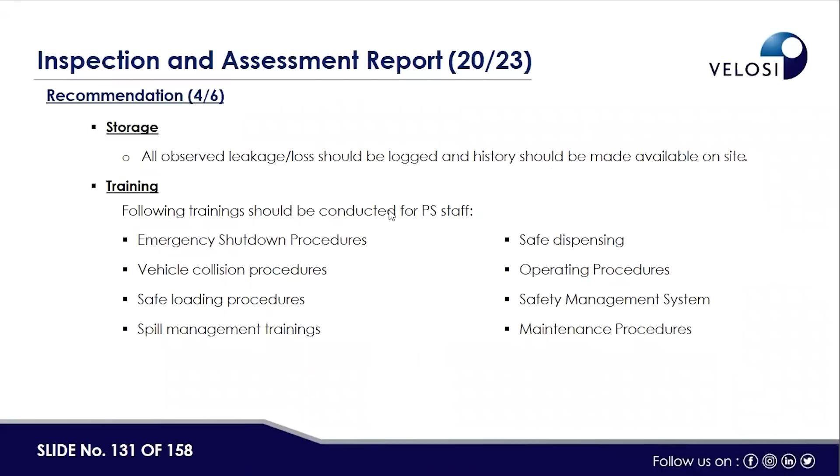The storage should be logged and history should be made. Training should be provided for the people as discussed. From the environmental point of view, car wash wastewater should be collected in a sump and should not be drained into the sewerage system. Wastewater collected in the sump should be taken to a remote location. Car wash water should be segregated for treatment prior to disposal. Periodic inspection of water tanks should be planned and performed.

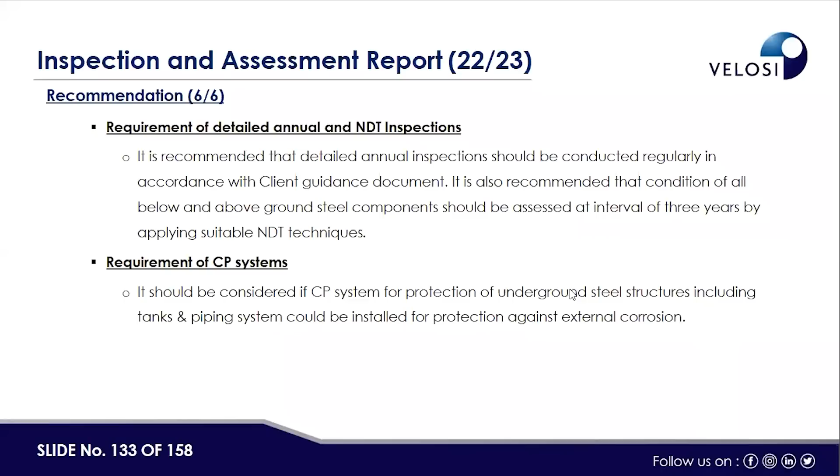Similarly, for engineering documents, whatever documents are missing should be prepared. For QAQC, the annual audit and NDT should be carried out as per plan. There is also a requirement of the CP system for underground assets.

In conclusion, the condition was satisfactory, but some corrective actions arising need to be carried out. The checklist was provided, and based on the checklist, some recommendations were mentioned.

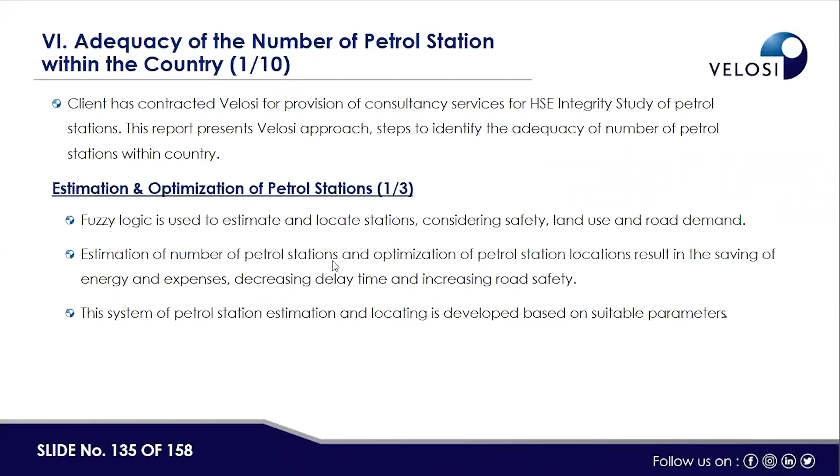The estimation and optimization of the petrol station was also part of this, like the adequacy of the number of petrol stations, which was carried out based on estimation and optimization of petrol station location. Fuzzy logic is used to estimate and locate stations, considering safety, land use, and road demand. The number estimation was done based on petrol station optimization of station location.

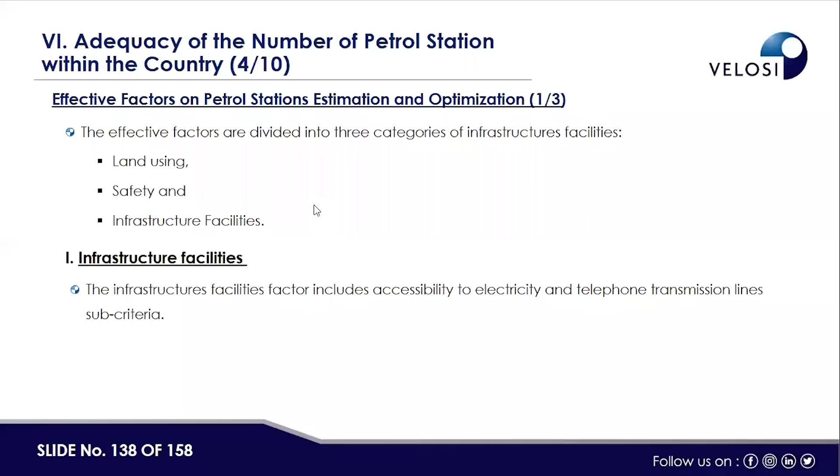The effectiveness factors used for the estimation included land use, safety, and infrastructure such as electricity, telephony, and transmission lines. From the road safety point of view: distance from the road, intersections, technical structure, and distance from big cities. These are the different factors that were considered in order to estimate.

Land usage categories considered were industrial, residential, agriculture, pasture, and plain lands. Accordingly, with reference to the risk, their GPS position was checked and mentioned, and categories were defined.

In conclusion, the optimum number of petrol stations in the country should be 110. This is based on the overall risk rating of the petrol stations as per HS (G) 146. That was the one suggestion provided as the recommendation.

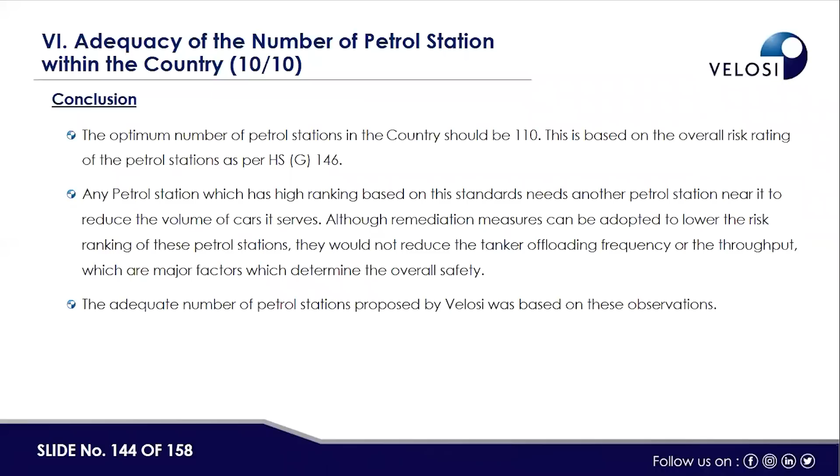The adequate number of petrol stations was proposed by Velosi based on observation. These are basically the observations we already discussed - assessment as per APA, as per HS (G) 146, checklisting, record keeping, risk assessment, and comparison between different risks. This includes the offloading and allocation of damage mechanisms for the tank and piping, such as thinning, corrosion, infiltration, microbiological damage, along with their POF and COF.

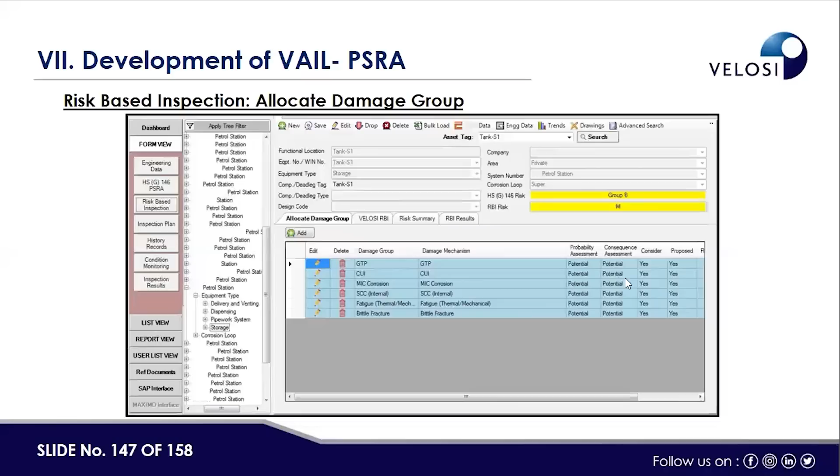Risk was assigned and an inspection plan was provided specifying which type of inspection should be carried out, such as visual inspection, NDT, ultrasonic thickness gauging, scanning, and RT.

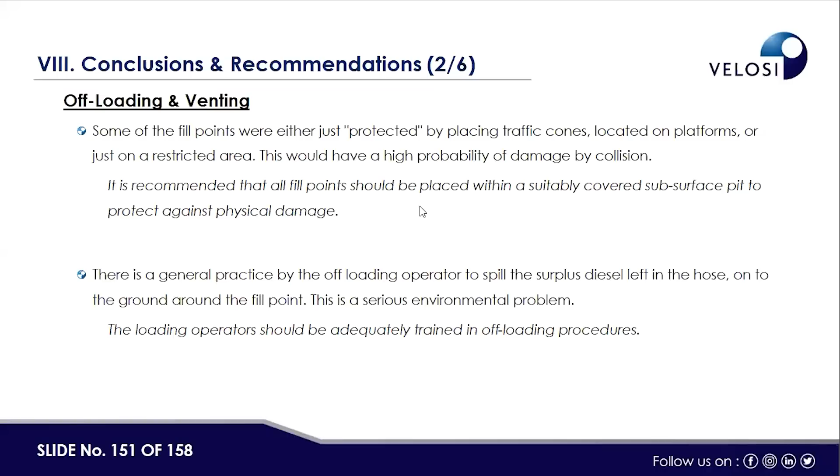Similarly, for offloading and venting, it is recommended that all fill points should be placed within a suitably covered subsurface pit to protect against physical damage.

Necessary arrangements should be made to relocate the emergency switches to an area which is manned 24/7 rather than a remote area. Training should also be provided for the people.

For inspection and maintenance, regulatory inspection should be carried out as recommended with respect to their frequency. The report was prepared including the executive summary, introduction, methodology, major findings, and inspection and assessment report.